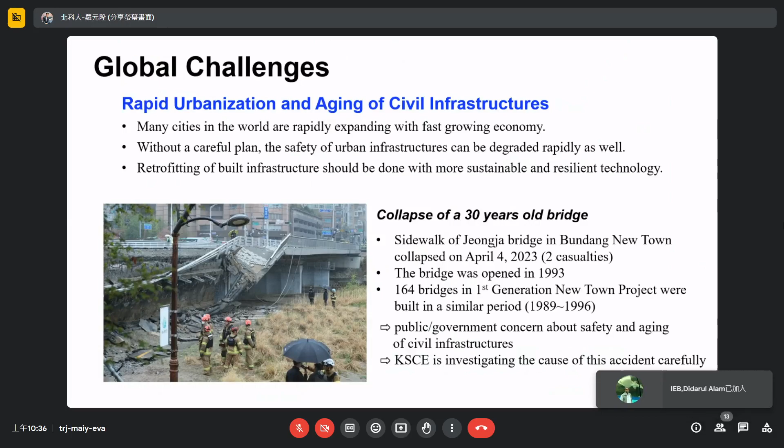As well as South Korea, many cities in the world are also facing similar problems. So you have to incorporate smart construction and maintenance technology that utilizes IoT, AI, big data, and other advanced smart technologies. This is very important, okay?

There is another global challenge: the global climate crisis and more extreme events. Nowadays, many countries, including South Korea and recently Libya, are facing climate change. One of the noticeable consequences of global climate change is that more frequent and intense climate events are expected.

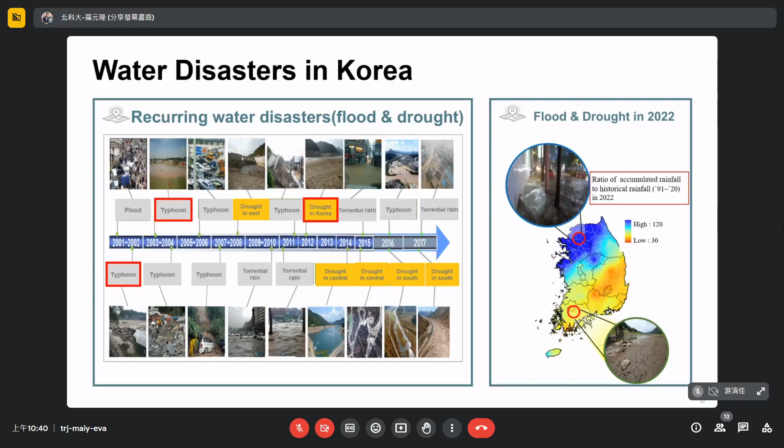That's a very serious problem. This year, just 2 months ago, there was heavy torrential rain in South Korea. It was reported that 47 people died, 35 were injured, and 3 people went missing. It's terrible.

There was a very terrible casualty event at the so-called Gungpyeong-2 underpass. This underpass has 4 lanes, and the length is 685 meters, with a 430-meter underground tunnel section. One of the banks of the Miho River, which is controlled by the local government, is beside the underpass, around 400 to 500 meters away.

This bank collapsed at 8:30 a.m. on July 15th, a Saturday morning. Then over 60,000 m³ of mud water rapidly flowed into the tunnel in just 2 to 3 minutes.

In this picture, the Miho River is on this side. You can see the mud flow into the underpass. It was fully filled within just 2 to 3 minutes. This is a CCTV captured image.

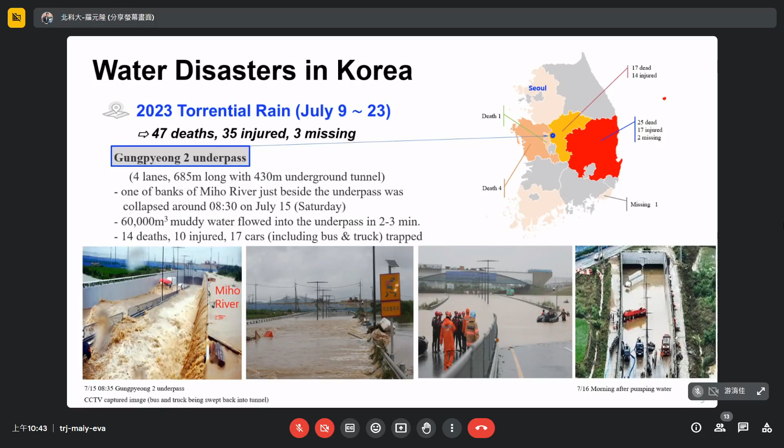So, it's terrible. And then everybody knows the Sustainable Development Goals, right? There are 17 goals, right?

Here SDG 6, 9, 11, 12, and 13 are closely related to civil engineering. In particular, target 9.4 is to upgrade our industry and infrastructure for sustainability. Target 9.4 calls for building resilient infrastructure and promoting inclusive and sustainable industrialization and fostering innovation, which is quite a significant challenge to us, right?

To achieve target 9.4, we need innovation and technological investment, and I hope the collaboration of the ACECC members and the interdisciplinary approach are required. So we need more collaboration.

And then everybody knows smart technology will be a core player in civil engineering in the future, right? So let me show two examples of how to tackle global challenges with smart technology in South Korea.

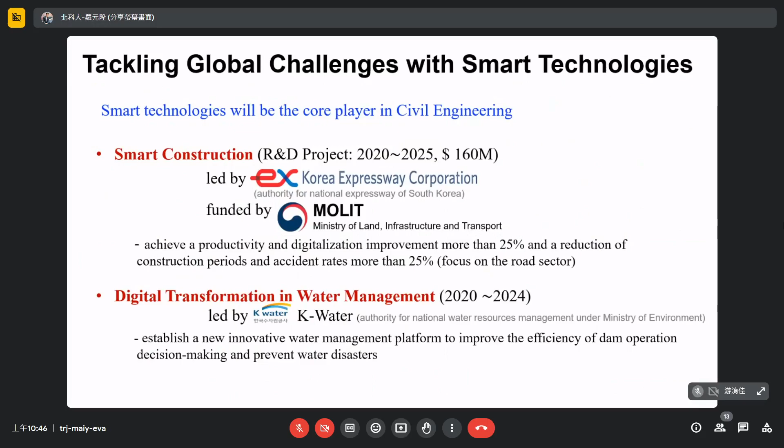Let me explain this one. This smart construction R&D was led by Dr. Sungmin Cho, he's over there—please stand up. He controlled this big project. He's also committee chair of TC30, right? 131 organizations with more than 1,000 researchers were involved in this project.

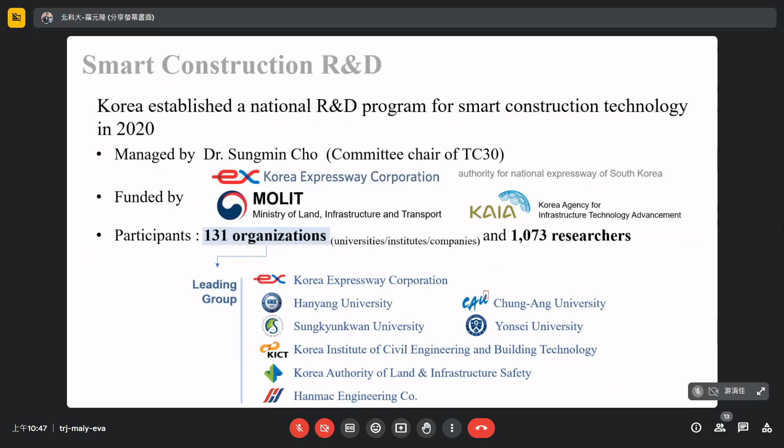I'm going to show some video. What is smart construction? This is prepared by the Korea Expressway Corporation, around 4 minutes long.

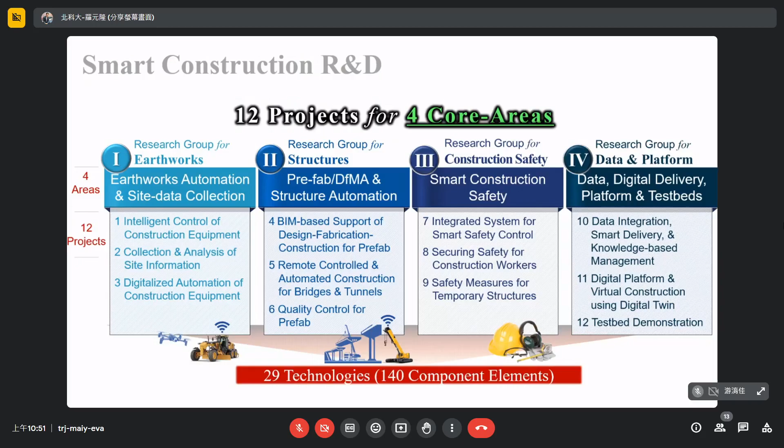This smart construction R&D is composed of 12 projects across 4 core areas. The first area is earthwork automation and site data collection. The second area is prefab, DFMA, and structure automation. The third is smart construction safety. And the last is a data and digital delivery platform and test bed. There are 29 technologies, including 140 component elements.

Let me briefly explain this. The first area focuses on earthwork automation and site data collection. The main purpose is to develop technologies by integrating site information acquired through autonomous measurement using drones, unmanned ground vehicles, and various sensors.

There are three specific projects: the first is intelligent control of construction, the second is collection and analysis of site information, and the third is digitalized automation of construction equipment. We hope to improve the productivity of earthwork for road construction by more than 25% after this project.

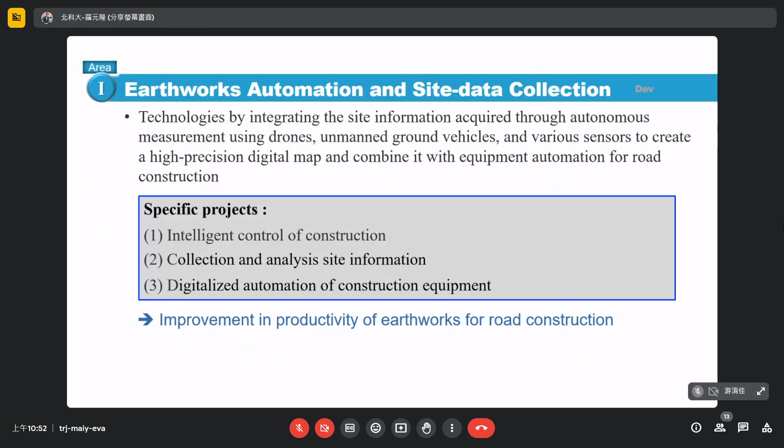The second area is prefab, DFMA, and structure automation. In this area, we want to develop technologies that employ BIM, AI, 3D scanning, prefab, and robotics to improve the design, fabrication, and construction process. Another purpose is to develop remote control automation technology.

There are also three specific projects here. The first is BIM-based support of design, fabrication, and construction for prefab. The second is remote control and automated construction for bridges and tunnels.

The other one is quality control for prefab. So in this area, we want to reduce the construction period more than 25%.

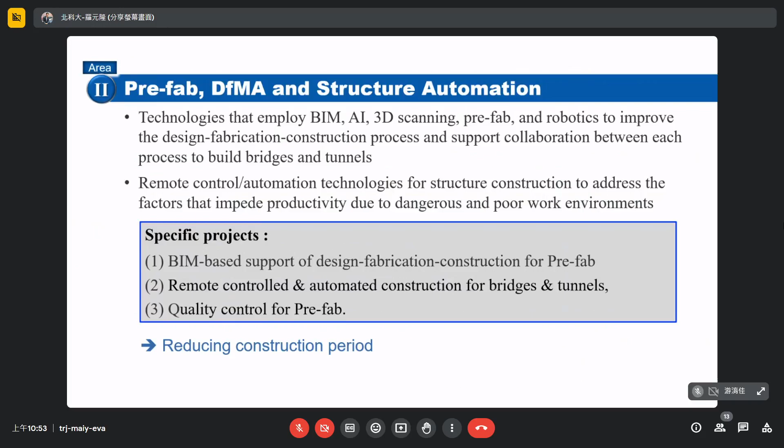The third one focuses on smart construction safety, because nowadays safety is very important in my country. There are three specific projects: first, the integrated system for smart safety control; second, securing safety for construction workers; third, safety measures for temporary structures. Through this project, we want to reduce construction fatality by more than 25%.

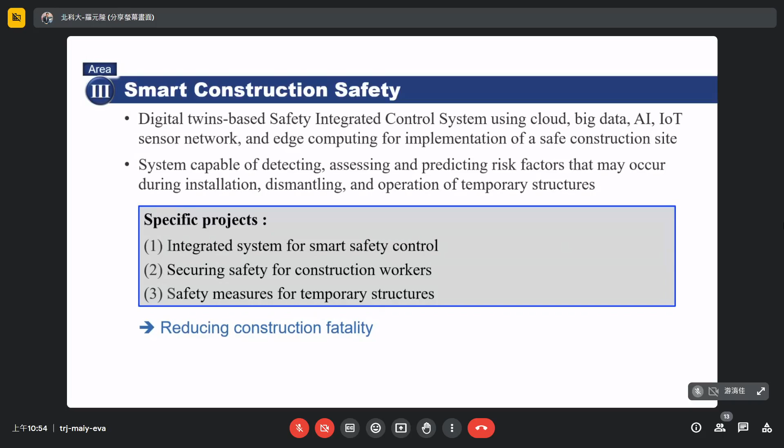The last one focuses on data, digital delivery platform, and the test bed. In this area, we want to develop technology for provision of information and services appropriate for digital platform users. Also, we want to construct a comprehensive test bed to verify the developed technologies for each sub project.

There are three specific projects here. The first one is data integration, smart delivery, and knowledge-based management. The second one is digital platform and virtual construction using digital twin. The last one is test bed demonstration. So we want to improve the digitalization in the construction process through this project.

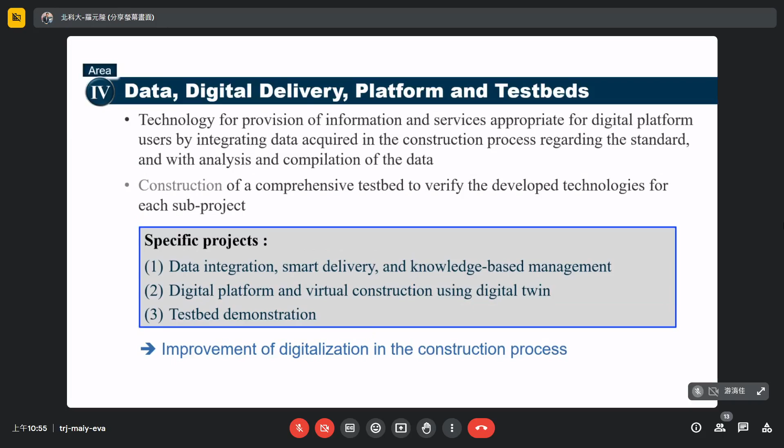There are several videos, but because of time, I'm going to show the last one.

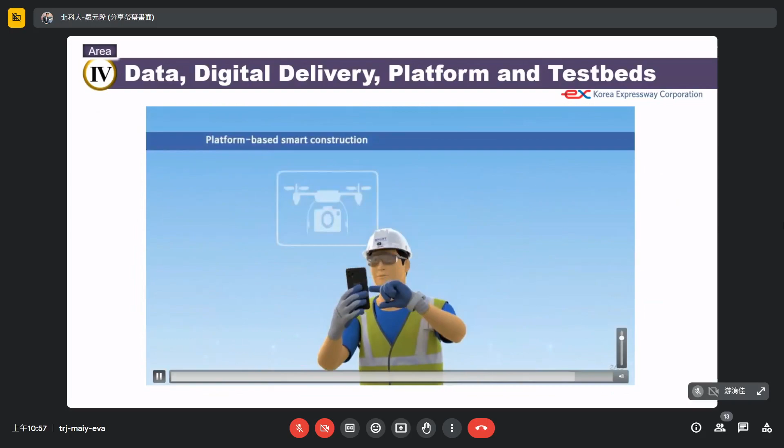This is for the smart construction R&D project. As I said in the introduction, there are now many countries, including the United States.

Addressing climate change, I'm going to show one more example. This is digital transformation in water management, developed by K-Water. Let me explain this one.

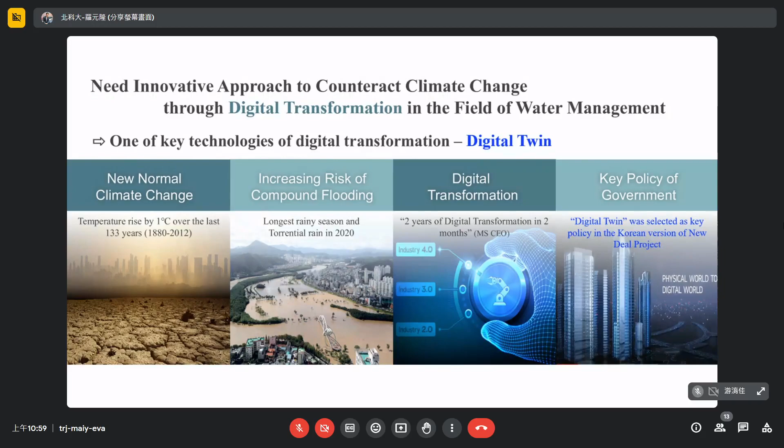To overcome new normal climate change and reduce the risk, we need an innovative approach to counteract climate change through digital transformation. One of the key technologies of digital transformation is digital twin. Last year, digital twin was selected as a key policy in the Korean version of the New Deal project, so now the government is very concerned with this.

There was massive flooding in the downstream areas of Yongdam, Sumjin River, and Hapcheon Dam. These three are multi-purpose dams controlled by K-Water. There was a long rainy event lasting 54 days with heavy torrential rainfall. K-Water released water based on their manual, but there was still flooding downstream.

Eventually, K-Water paid several hundred million US dollars for flood damage compensation. I don't like that, but the government pushed K-Water to pay. It was a very, very bad case. So now K-Water is trying to develop a system called digital twin.

In 2021, they developed a so-called pilot platform for the Sumjin River Basin. Now they have upgraded and expanded this digital twin to cover 5 river basins.

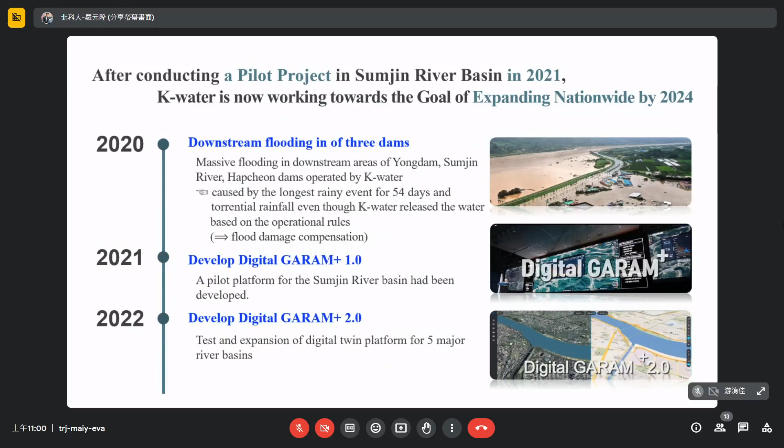The digital twin is a cyber-physical system that synchronizes the real world with the cyber world. Using various data in the cyber world, the user can find optimal operation rules by monitoring, simulation, and prediction. Then this solution can be fed back into the real world.

So... okay, what happened? I think the file is too big, so sometimes it's very slow. I know what it is—it's stuck. Sorry, it's stuck.

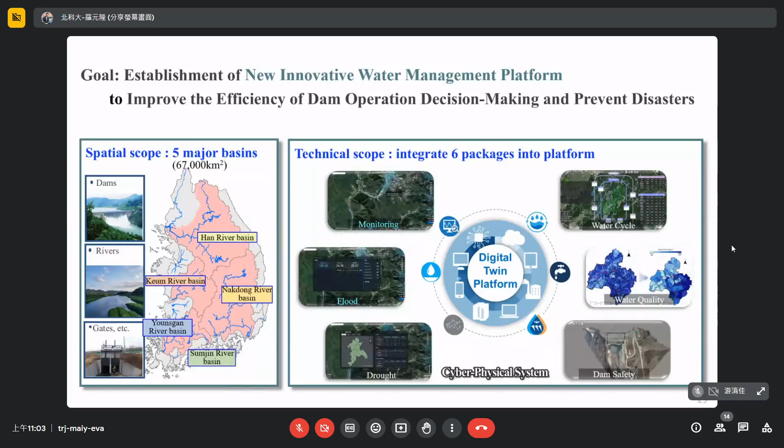Regarding the technical platform, the monitoring and flood platforms are already developed, and the rest are under development.

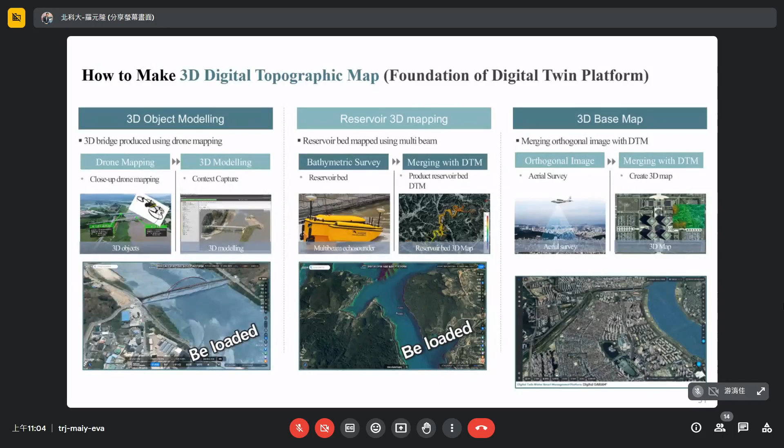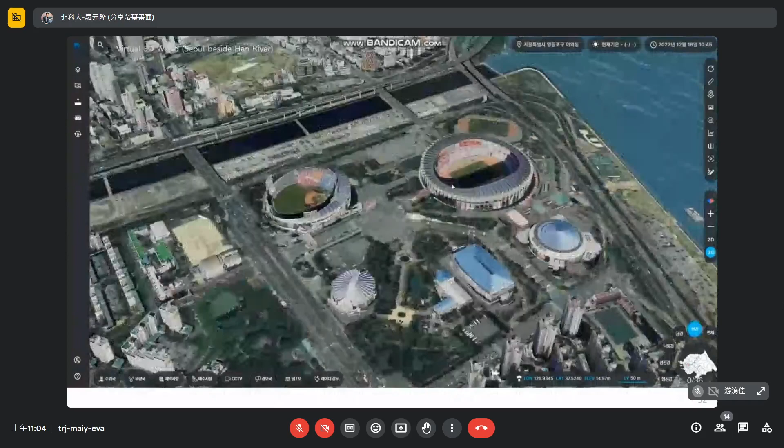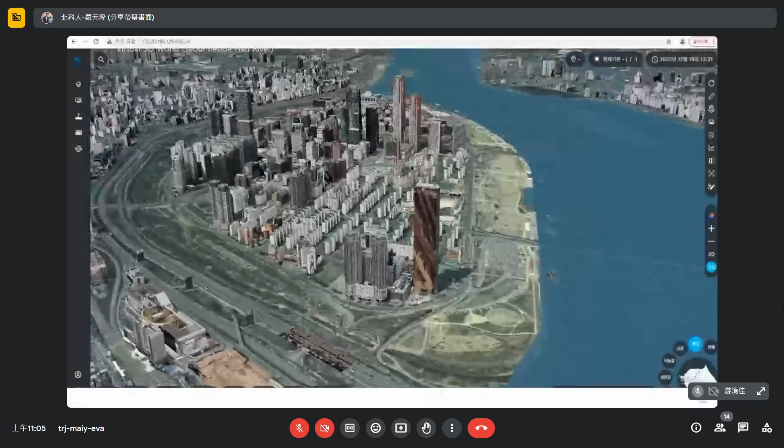And this is the 3D virtual world. This is Seoul, the Yeouido area here, and this is the Han River. It's very high resolution, so they have a view of the urban area. The so-called level of detail there is 4, and in the rural area the LOD is just 1 or 2. This is the Han River. I live here, my home is just up here.

It's displayed on the smart big board at the K-water integrated control room. You can see the very small computers here, personal computers. So this platform can be used individually using a personal computer, so the people here can type and do everything, right?

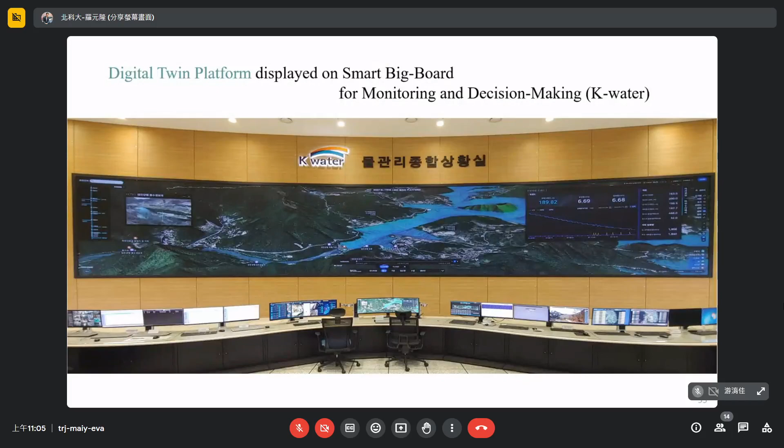And this shows the demonstration video for Garam, the digital twin platform developed by K-Water. The user interface emphasizes the 3D object.

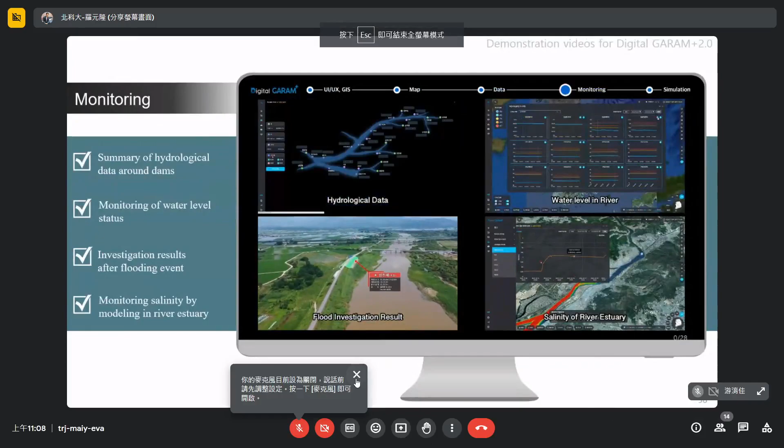Here you can investigate the flood result, and you can also monitor salinity by modeling in the river estuary, because in my country three sides are exposed to the sea, right?

And this is the simulation platform. This is the core of this platform. There is a 2D flood simulation in the river basin, and the urban area simulation can be done based on WebGIS and game engines.

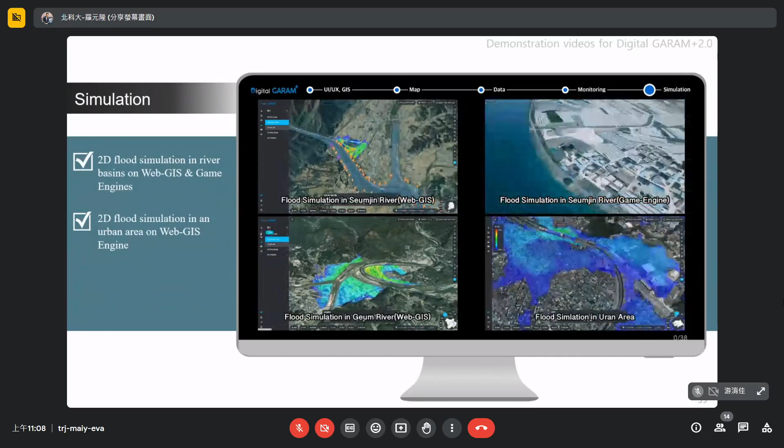You can see here, this is a flood simulation for the Seumjin River, and there's also a flood simulation for the Seumjin River using the game engine. This is a flood simulation for the Geum River, another basin, and also a flood simulation in an urban area.

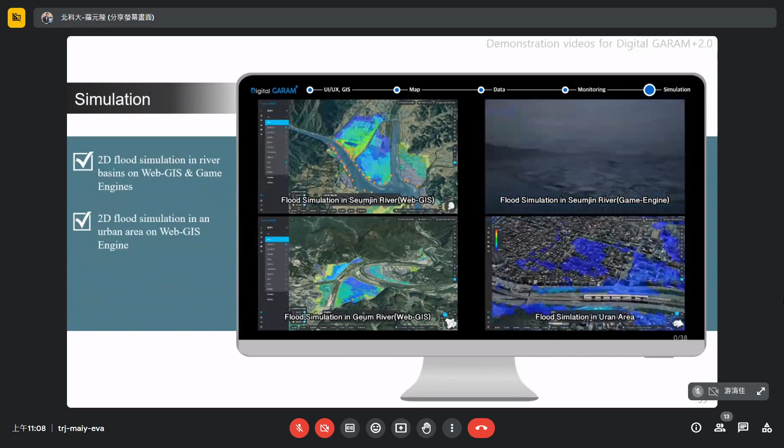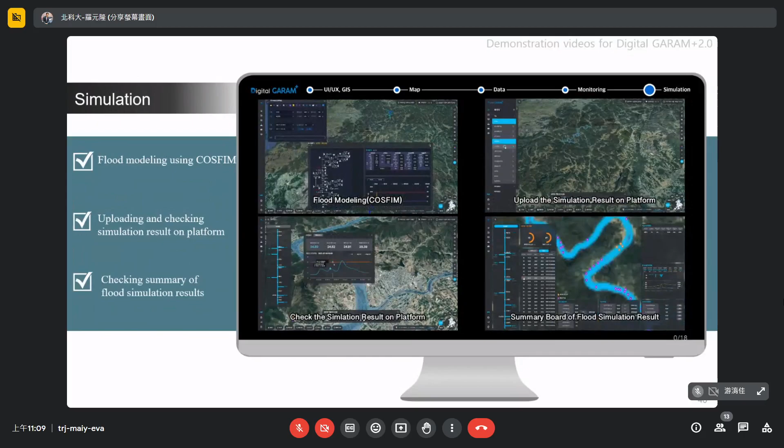K-water uses a so-called COSFIM for the modeling, and the user can upload and check the simulation result, and also check the summary board here. So in the control room you can run the simulation, check it, give feedback, and everything is controlled from this control room.

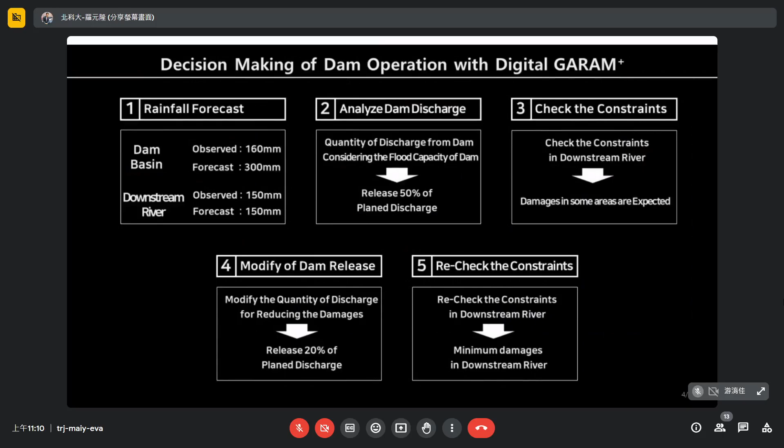There is some example video, but the audio recording is not good, so I'm going to skip this one.

So this is the final conclusion. I briefly introduced how Korea is preparing for the future with smart technologies. I explained two examples: one is smart construction R&D, and the other is digital twin management and water resource management.

Smart technologies help agile decision making based on reliable data and can reduce the risk in our lives, right? I believe smart technology will make us live in a better future, everyone believes that. But I want to emphasize that these smart technologies are only auxiliary devices. So even as we get many benefits from these excellent smart technologies, we should not forget that proper decisions should be made based on civil engineers' expertise, in other words our expertise, with a solid foundation.